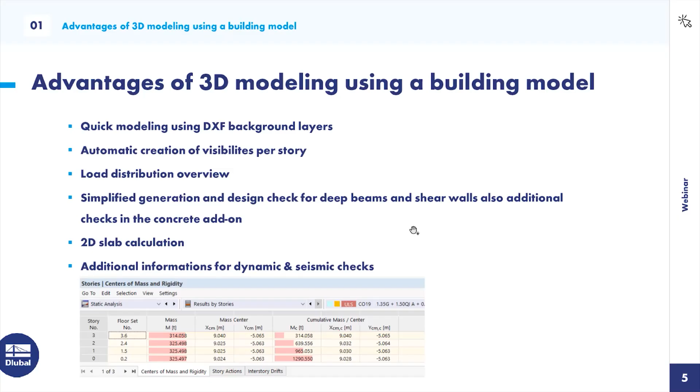Okay, then let's switch to the next chapter. Here is a little overview comparing it with positional structural analysis. The pros of positional structural analysis are, of course, that you can model it very fast and also do the design checks, and you only have 2 degrees of freedom in this 2D calculation. So you mustn't consider so many effects and so on. It's very simple, and you can check it very easily.

The cons are when you design a slab or, let's say, a story, you calculate this, then you must make a load transfer from the story to the walls, to the columns, and from there again to the slab. So you must transfer again and again until you are on the ground floor. And there you can make a failure very easily when you forget some loads.

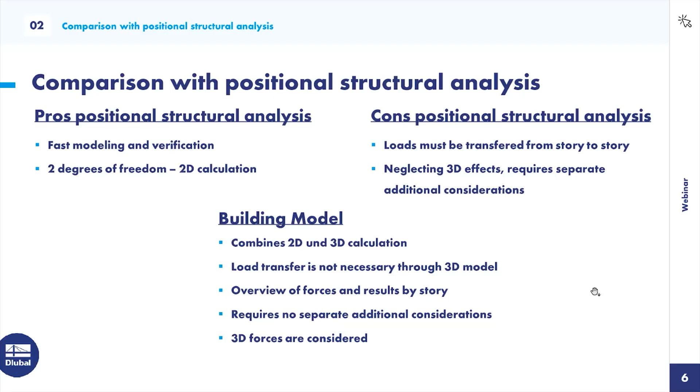Okay, now about the impact of our construction stages analysis. It's more nice to know. I only want to show you the options you have with our add-on. Here you are able to consider construction stages. So I will show you, for example, here first the walls and the columns. Then, let's say after 30 days, we make our slab for the ground floor. 30 days later, the first story, and again.

So in connection with the time-dependent analysis, you have the option to also consider time, and that's very great because I'm on the concrete team. That's important. What I think about first is the material parameters, for example for creep and shrinkage. So you see, after 30 days, it's a completely different creep coefficient in comparison to 120 or 150 days. So you will have influence just from these material parameters. And we can consider this when we use the construction stages and the time-dependent analysis. But I will also show you this later in RFEM 6.

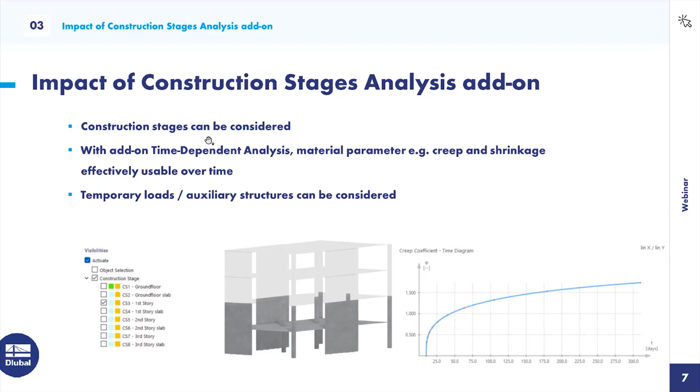Okay, that should be my overview of what I want to show you today. And now let's switch to RFEM 6. Therefore, I will create a new model, and let's call it building model, with the 3D type of model, of course. And here are the add-ons we need. At the end, I will show you the construction stage analysis and the time-dependent analysis. But for the first step, I only activate the Building Model add-on and our concrete design.

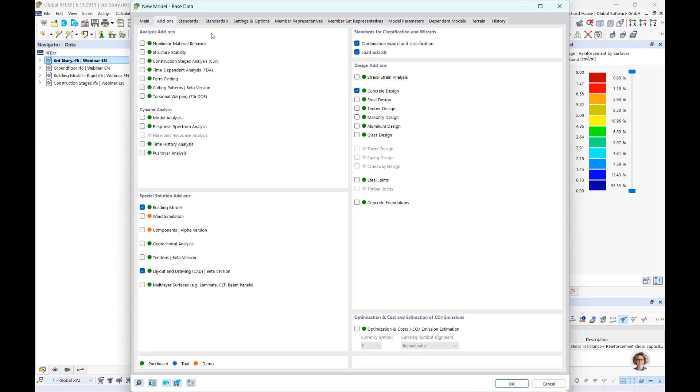Here in the standards, I choose a German example today. So let's choose the national annexes here.

And what I also want to show you is we have load wizards for wind and for snow. And a nice connection we have, I want to show over the model parameters. So if you know, we have our Geo-Zone tool where you can see the forces from seismic, from snow, or from wind. And we have a connection in RFEM 6 directly when you click on this button. In the background, it opens our Geo-Zone tool. Here you see our information about snow, wind, and seismic.

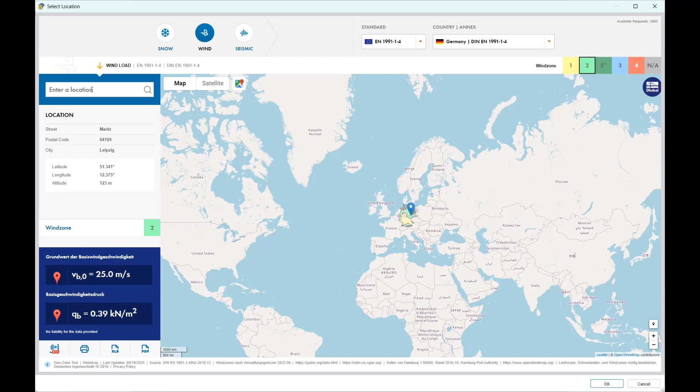So let's take our Dlubal office in Leipzig and say OK. And so we see here the characteristic values of the snow load and also of the wind loads. And when we click OK, RFEM 6 imported this information from the Geo-Zone tool. And when we now click OK, RFEM has the information, and when we click later to the load wizards, RFEM has directly the information, and you don't need to choose the category or the wind zones and so on. But yeah, I will show you later.

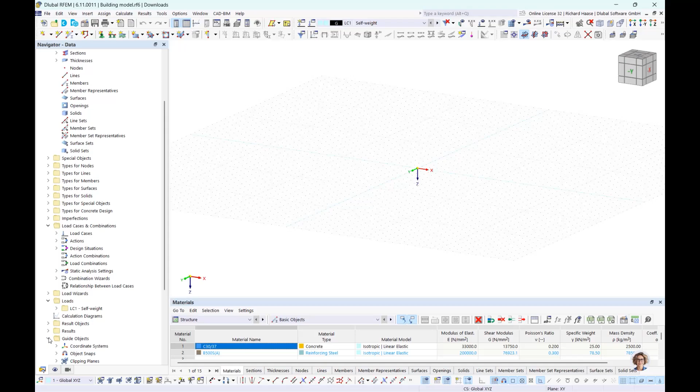Okay, then let's go to the materials. I have chosen a concrete C30 and reinforced steel B500. And of course, I want to show you the quick modeling. Therefore, we need under the guide objects our background layer. Okay, here we have our background layer. And first let's switch to the building model. And here we can create our building stories.

And let's say we want to have a 3-meter height and want to have 3 stories over the ground floor. And we want to choose here our floor type rigid. And when we choose semi-rigid or rigid floor diaphragms, we have the option to choose here for all nodal and line supports. We can choose the supporting type, which you can analog design in a 2D calculation.

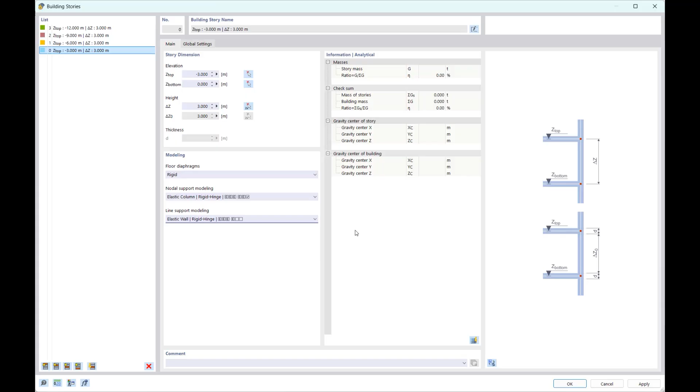So let's say we want to have for the upper floors hinge to hinge, and also here hinge to hinge, and in the ground floor we have a rigid hinge and also a rigid hinge. Okay, then we have created our stories. And then let's begin with the modeling.

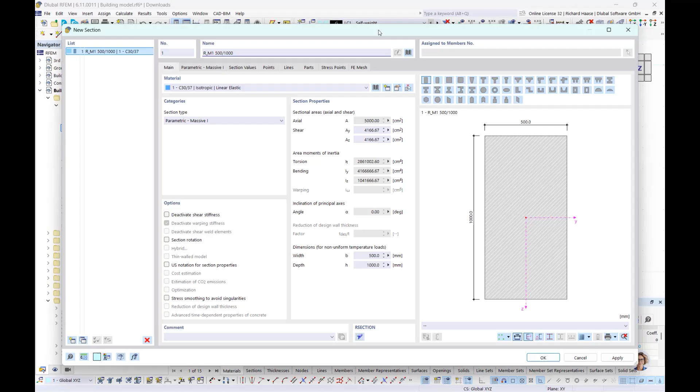First, okay, maybe we delete this and say, okay, I need a new section. And we see here we have circular columns. So I choose this column. Okay, let's say 200 is the default setting. And now we want to measure the information directly from the DXF background layer. And can say, okay, from here to here. And it's switched to 500 millimeter diameter. And say, okay. Then we also have our walls.

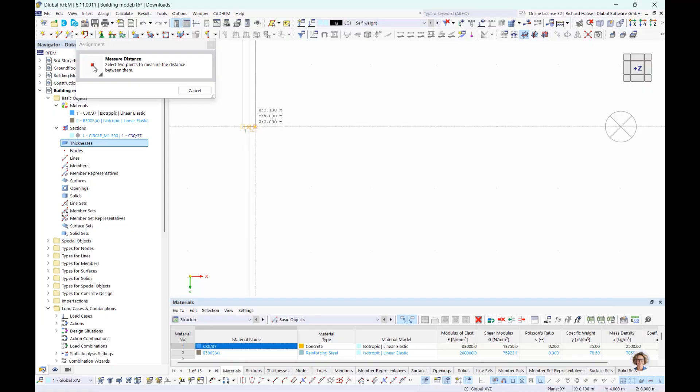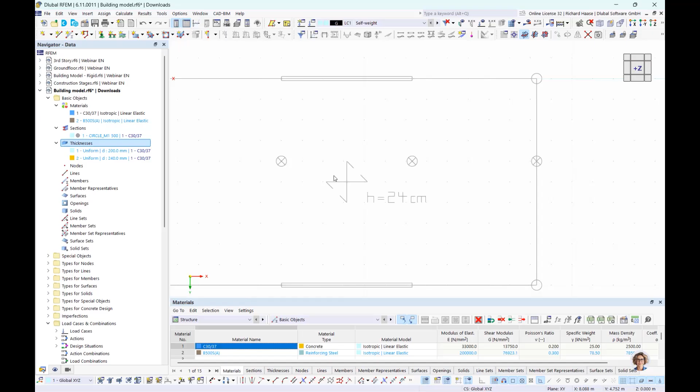Therefore, we do the same, a new thickness, and say, okay, the only thing I changed, so that you see that it works, is 300 millimeter. And let's say it's a default setting, and I measure now the information from the DXF file, and we have our 200 millimeter for our walls, and we need a new thickness. And I show you for the slabs, and it's 24 centimeter. Of course, you can't read this information off this 2D background layer, so I take this information and then it's fine.

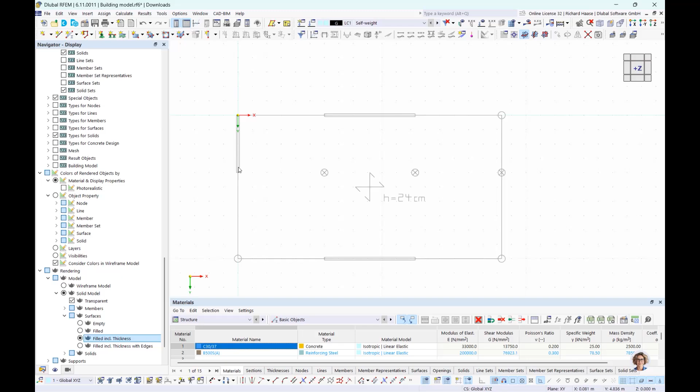Okay, then we have created our section and our thicknesses, and now I want to change for the input our rendering. Therefore, you go to the model, solid model, surfaces, and here we have the option filled inclusive thickness. So that's very good for control. You will see what I mean in a few seconds, but let's first start with the columns. So this button is only available for the Building Model add-on, and this button gives you the option of modeling via the bird's-eye view.

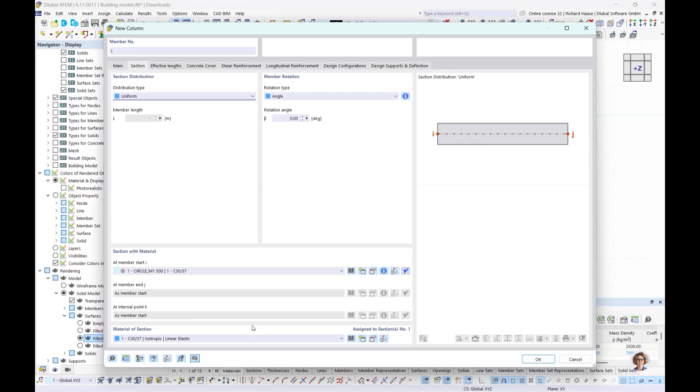So let's start with our columns. Okay, we choose our measured section, and here we can select the building stories, and let's say, okay, we have this column in all building stories. Apply, and oh, I made a mistake, sorry. Again, I clicked too fast. Okay, so we have these columns, and go here, and you see directly this big bubble. It's the sum of the masses per story.

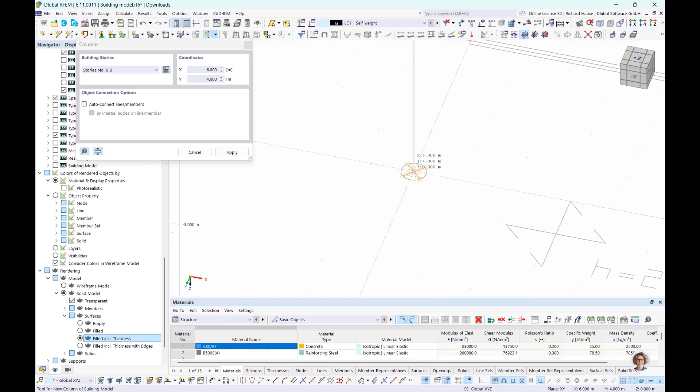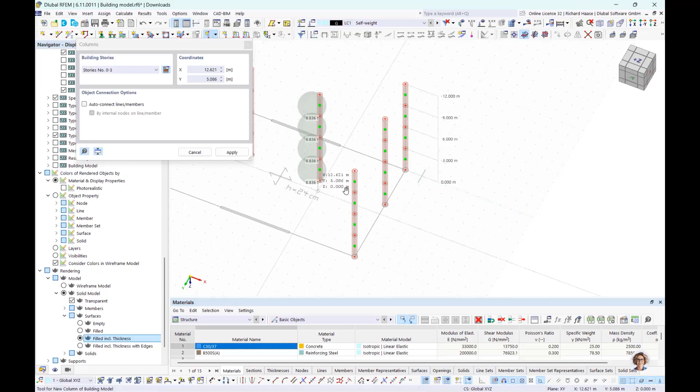So when we click here to another point for the columns, you see, okay, it's growing and moving more into the middle. So, and let's do this for the others too. And our columns are ready. So now the same game for our walls. Our 20 centimeter. Okay. Maybe we switch back to the bird's-eye view. And wall 20 centimeter.

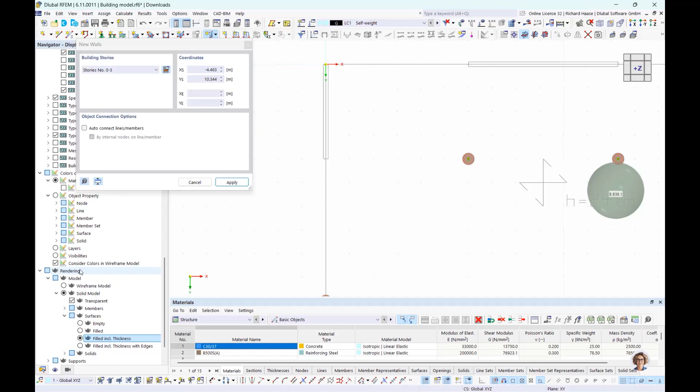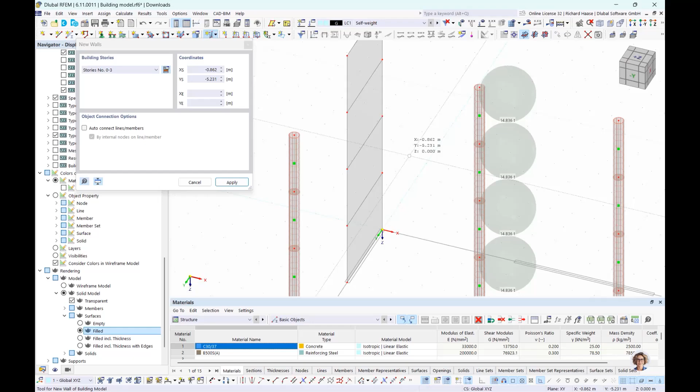And now you see here our rendering option. There you have a direct control option if the thickness fits the background layer. And you see, okay, it fits. The default setting is only filled, and therefore you have this 2D visualization. And here we have the real thickness, and I prefer this for controlling. Okay, let's continue with the other walls.

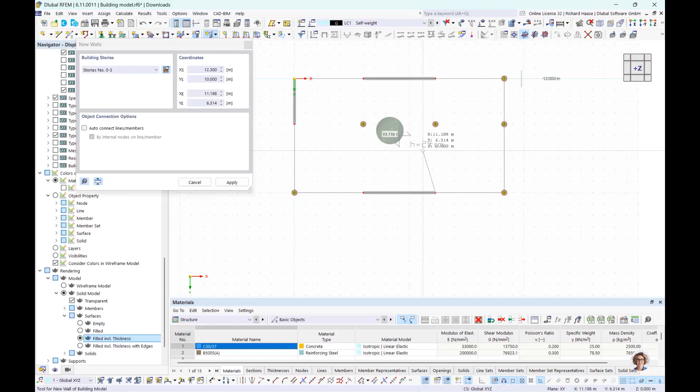And our last walls here. Okay, one thing is missing, that's the slabs. Let's choose here the rectangular floor. Therefore we need the other thickness, 24 centimeters. And of course, all stories is activated.

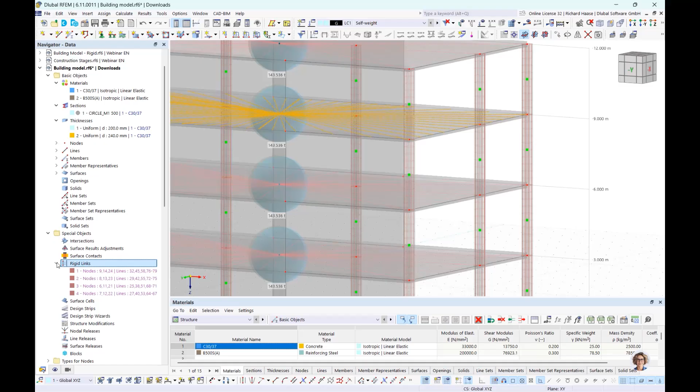Good. Now we see here these red lines. It's the special thing of our slab type rigid, because for these rigid slabs we have here also special objects, rigid links, and these rigid links connect the edges of every slab to the center of mass per story.

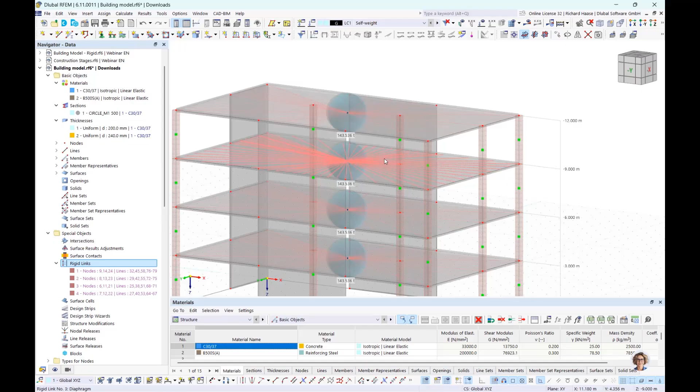So this is a good point for dynamic analysis, because it simplifies the masses to one point, and it's then more clear for dynamic and seismic analysis. And this reduces also the calculation time and the eigenvalues. It's a really nice feature for dynamic analysis. Okay, so we also can deactivate it here, in special objects.

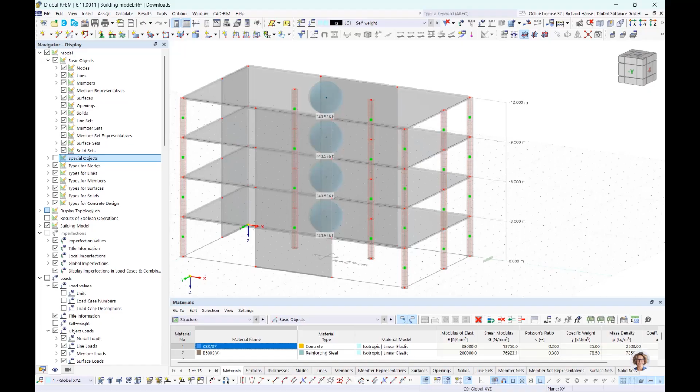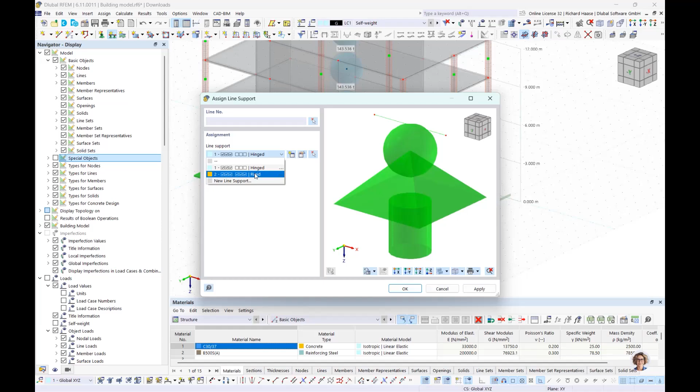And now let's continue with the supports. Let's say we have here our fixed nodal supports. Okay. And also the line supports, let's say it's also rigid. Choose here, here, and here. Okay. Then let's go to the loads.

Therefore, we must create some load cases. Let's say here self weight, or dead loads. And here we need some live loads. The snow and the wind load cases I will show you through the promised load wizards. So let's say okay here, and go now to the load cases and create some surface loads. Really simplified, but it should fit.

Okay, let's say we have here 2 kilonewton per square meter, and we can say apply and next. Switch to our live load case, and here we want to have 3 kilonewton per square meter. Okay, and let's finish this. We also have the option to control this very fast, but it looks good.

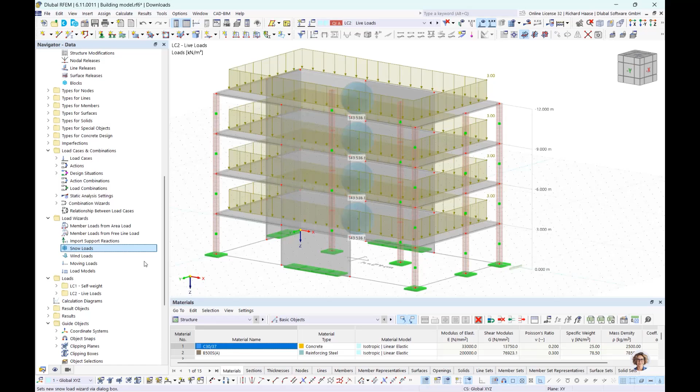Okay, but let's go to the snow loads first. We want to create a new load wizard for snow. We must first pick the roof corner nodes, here, and here, and we have a flat roof type. Go now to the parameters, and now we see what we did in the beginning.

The definition type is changed to map and parameters, to this German location, and you see here it's automatic which load zone, which height, and the characteristic snow loads and other coefficients. So this is simplified, and so it's easy to switch here. Okay, then to the load cases.

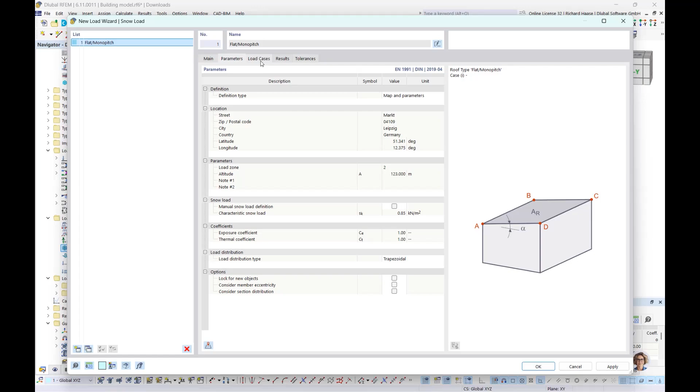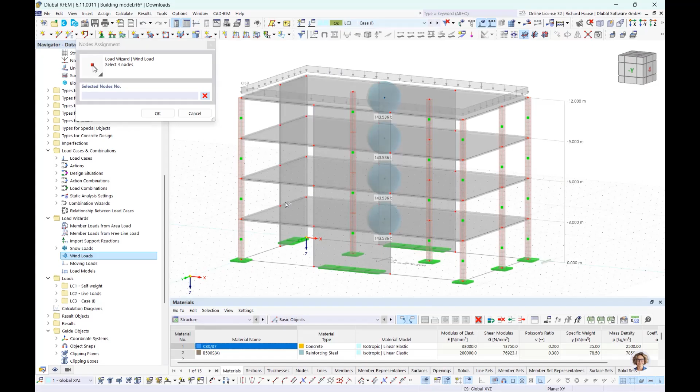So you see here, I would create a snow case here for you, and you only must click this button, generate load case, and say okay. And very fast, we have now our load case here with our snow loads, and the same works for the wind loads. Here we must, okay, that's the base corner. And here. Okay, the same for the roof corners, for the wind.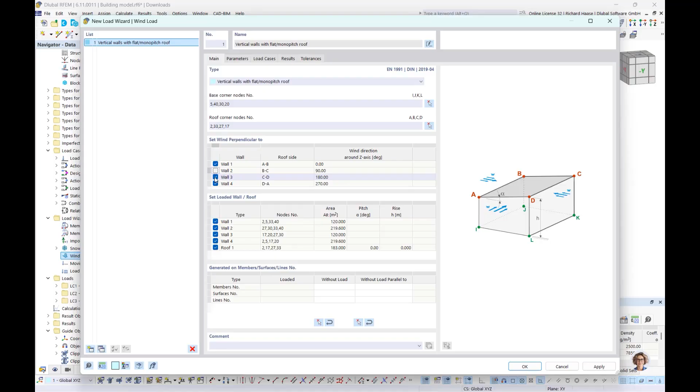Okay, so then you see on this picture, we have here our 4 wind directions, and let's say we limit this to wall 1 and 4. The parameters here are the same. You see our location, the terrain category, altitudes and heights, and load zone. It's automatically transferred from our map.

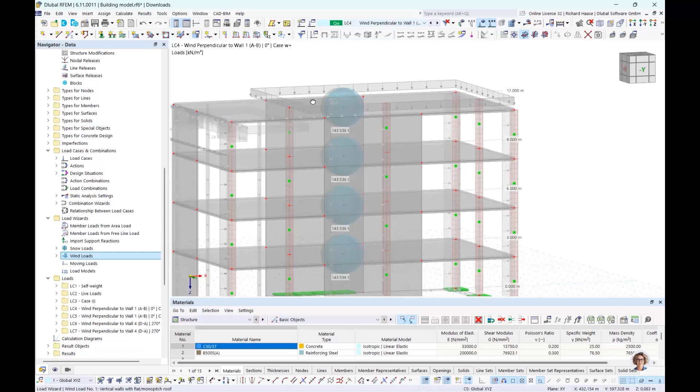So we have here again this option to generate automatically our load cases. We have here 2 cases per direction, and say okay, okay, and we can prove it, of course. So we see here our wind loads, here especially this load area for the slab, and the same works here for the other wind case.

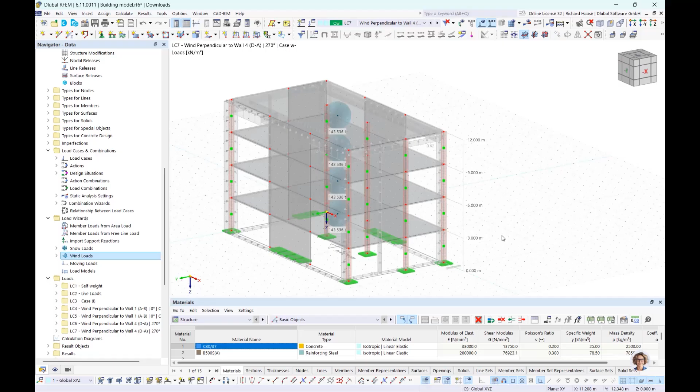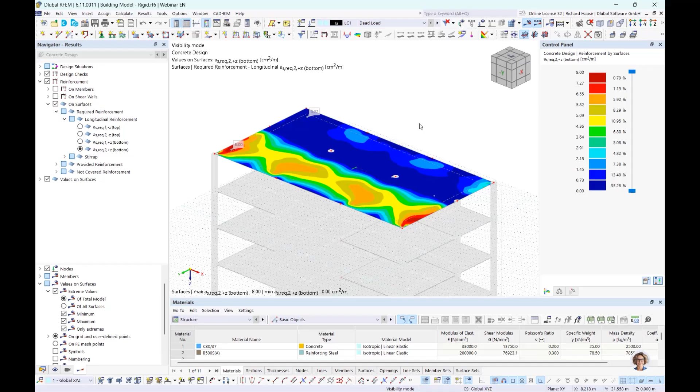Okay, so our loads are finished, and I don't want to waste time with calculation, and would switch now to a calculated model, our building model. Here we have results, and let's go to the dead loads and switch to the static analysis. So, oh, I haven't calculated. Okay.

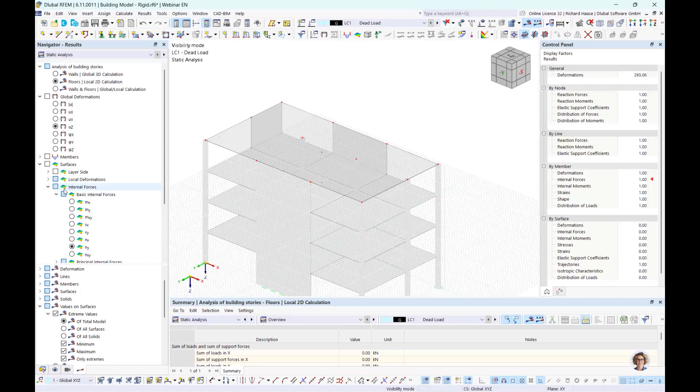And here we see the first thing which is activated when you have chosen the rigid or the semi-rigid floor type, that it is calculated 3 times, and that's because we have now here an additional option in the static analysis of building stories. So you can have a look only on the floors, on slabs, and I want to show the internal forces, the moments.

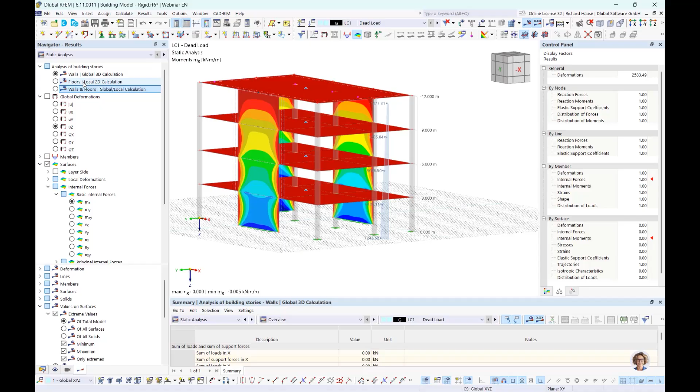Switch back to all, and now you see here really only the results per story per slab. When we switch to the 3D walls calculation, we have additionally our walls, and because these walls are connected via the slabs, internal forces can also be in the slabs. And this last option, walls and floors, is, let's say, a sum of these two. And here we have our

combined results. But what I want to show you before is our load distribution for the case of the dead load. Oh, and I forgot here our visibilities, which are automatically generated, sorry. In the normal case, you must define this by yourself, and the building model add-on creates them automatically per story, so you can easily switch and have for every story a fast generated view.

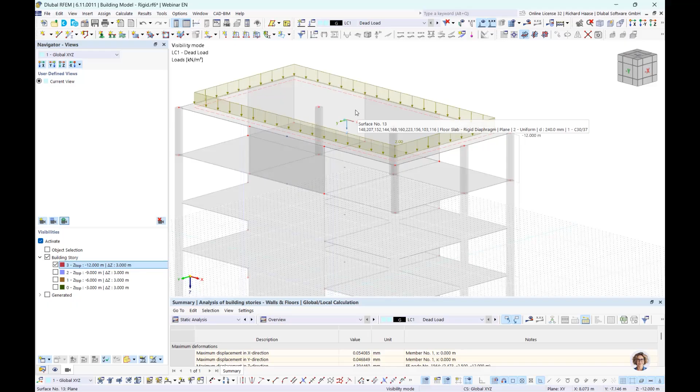Okay, but let's go to the third floor, and here we have our surface load, and we now have the option to see how the load distribution is. Therefore, we right click on the surface and have here this button, loads from distribution surface, and now you see how the surface load is distributed to the walls and the columns.

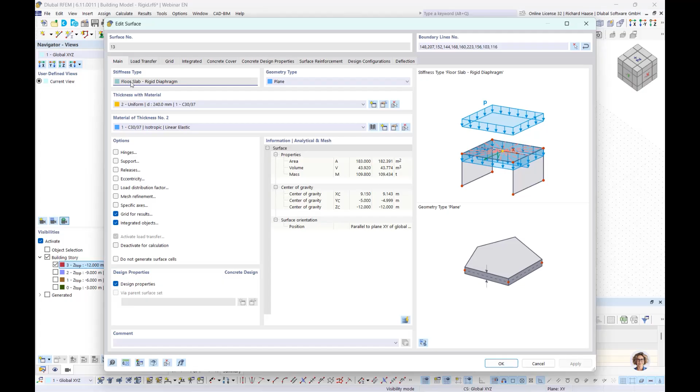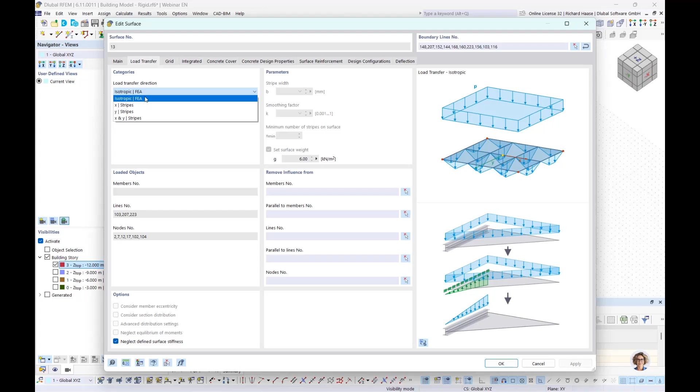And when you double click on the slab, you see here our stiffness type, floor slab rigid, and we also have here a load transfer menu. The default setting is the FEA type, but you can also say it should be only in the local axis X or Y stripes, or X and Y stripes, if you want to do it that way. Okay, but let's switch back.

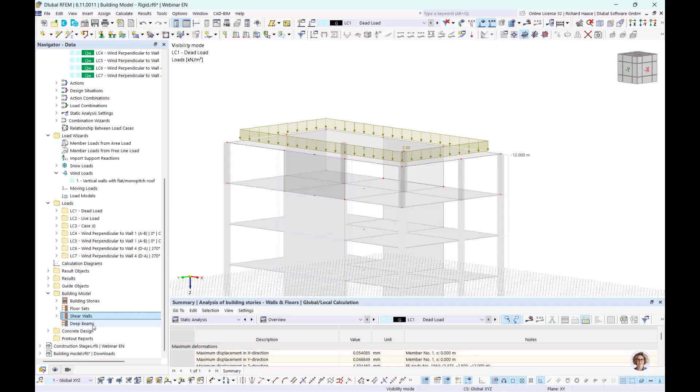Another thing I also mentioned in my presentation before is that we have in the building model the building stories you already see, and now we also have the option to define shear walls and deep beams. The shear wall I did here before. So when we click here, we have this one wall, and it is easy to define. You only must select surfaces or surface cells, or even a member is also possible.

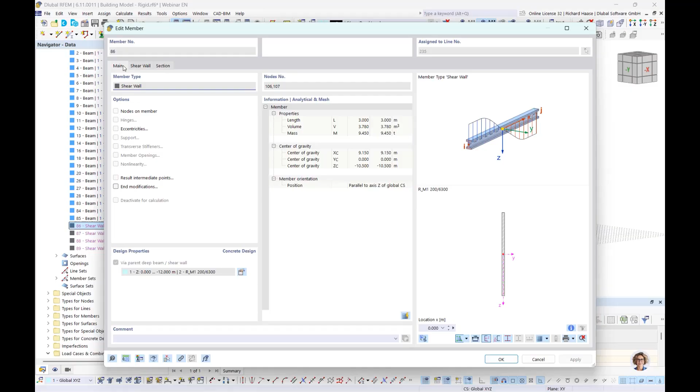And in the background, we can see here our columns, and in purple, the shear walls, which are generated in the background. You can also see here it's a result beam, let's say, which automatically integrates the surfaces, surface cells or members chosen before. And finally here our member sets. So you can also do this the manual way, but the building model add-on simplifies the steps.

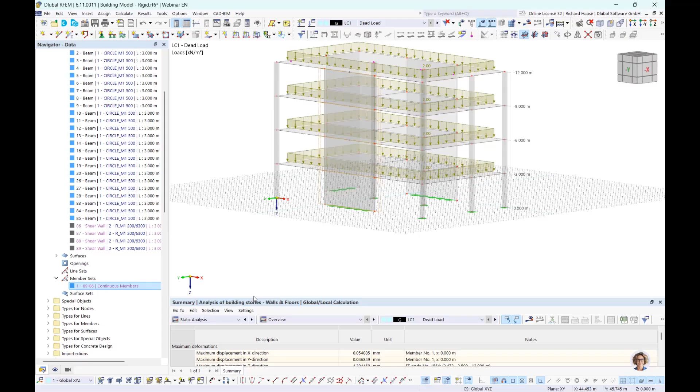And another good point is when we go to the static analysis, we have here a new chapter, results by stories, and can really see which results come from which story. We can see story actions, horizontal forces, for example here, or interstory drift of deformation.

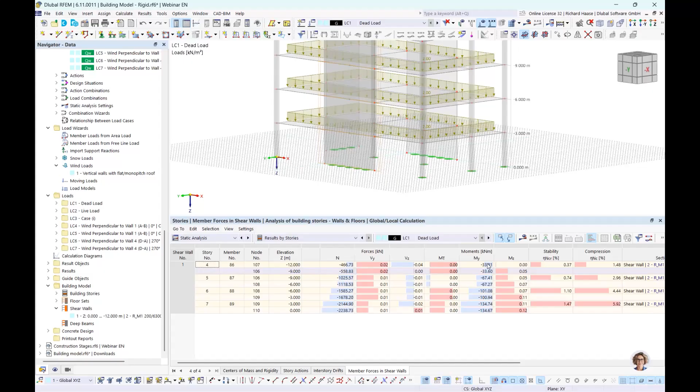And because we now defined our shear wall here, we have a new chapter, member forces in shear walls. So you also see here the axial forces, the shear forces, moments, separated for every story. And that's a feature only the building model can do. Of course, you can create it via a result beam, but these results by stories you wouldn't have without the building model add-on.

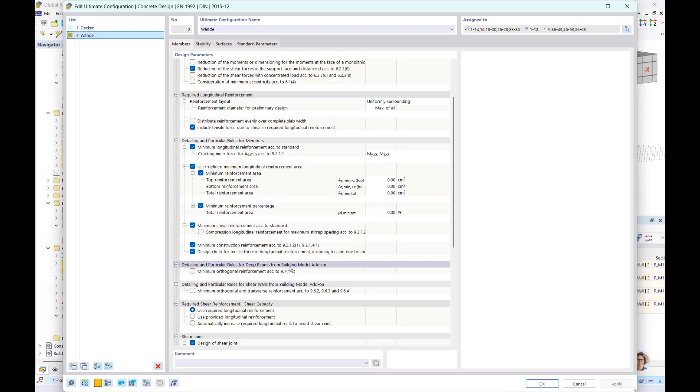Okay, then maybe let's switch also to the concrete design, to the configurations. And because these shear walls and deep beams are result beams, we have under the concrete configurations, in the chapter members, special additional checks, which are only possible when you use the building model add-on.

And also for a better overview in the concrete design, when we check here, we have additional design ratios or reinforcement calculations for shear walls and deep beams. So again, when you don't use the building model, all these ratios would be found on the members, so you have an extra chapter for that. It simplifies the work and gives a better overview of the results.

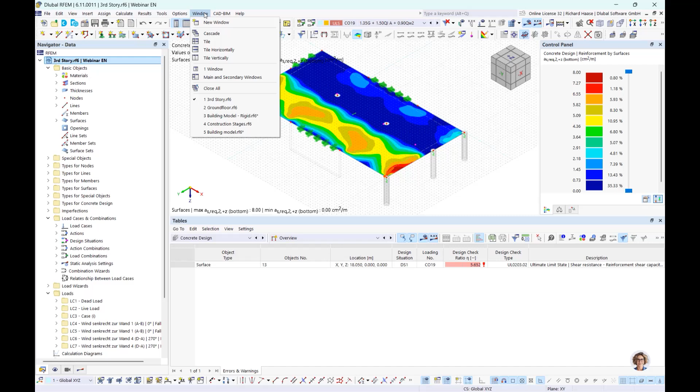Okay, then let's compare to, let's say, a traditional way to analyze slabs. We want to have a look at the third story, and I will show you that we have really exactly the same results. Therefore I want to arrange the windows next to each other, and that was also the wrong one. Okay, now we have selected both. I want to show you the window again.

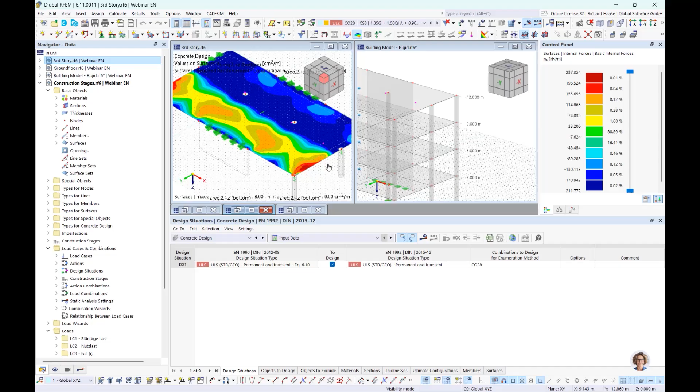Go here, select only the third floor. Okay, now you see the 2D model.

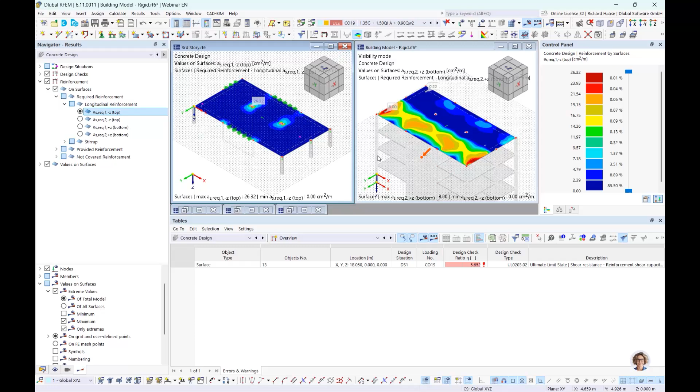Choosing also here type of model, 2D plate, and let's compare the required reinforcement. Let's go here, and with our building model, you see we have exactly the same results.

Let's do it again, and the last one. So you see it's with the building model, it's possible to have a traditional structure analysis calculation of 2D, but integrated in a 3D model. And yeah, you get the same results here.

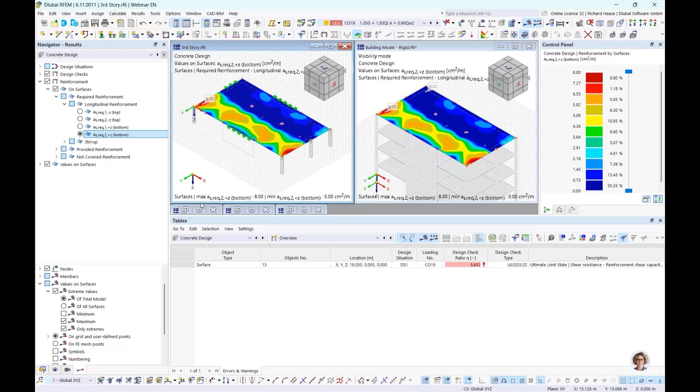And yeah, that was what I want to show you. So okay, maybe we go, I hope this was the right model, to the ground floor.

Because I also want to show you the option with the load transfer, and show you that it works the same way with the 3D model. So yeah, I have created an extra model for every story.

And here my last step was to load transfer from the first story the forces to my ground floor slab. And here you see this connected model. The thing is, it works - you must create in our Dlubal Center connection that all models are in the same folder, and then you have the option to connect these models.

And when we switch to the object chapter, you're also free to use it manually. There you can say, okay, for example, I only want to transfer only single nodal supports or single line supports to this and this node or line.

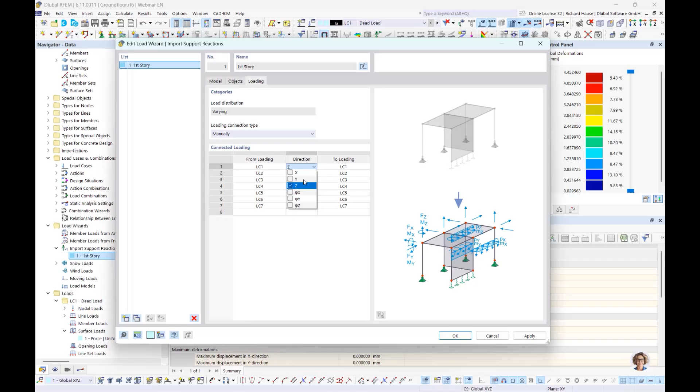Yeah, then to the loading, you also have the option to say, okay, I want to choose it manually. So you can transfer from load cases or also from load combinations to our actual load case or load combination, and can choose here also the type of forces which should be transferred.

So I only choose here the Z direction. And yeah, only for comparison of the dead load, you see here again in this purple color the loads which come from the first floor slab, and yeah, can control it here, also the forces.

And yeah, and these models are also connected. For example, when I change something in the second floor, these load transfers are connected with each other because they are in the Dlubal Center folders, and then it's an automatic recognize that this change

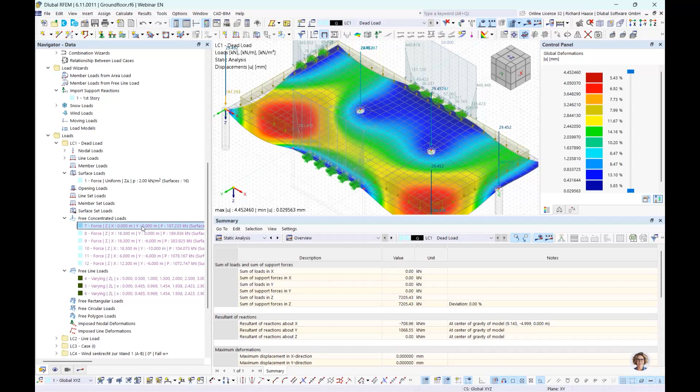also results. And if you don't want this, you can also say, okay, that's finally good enough. You can separate here the connection, and then yeah, it's fixed.

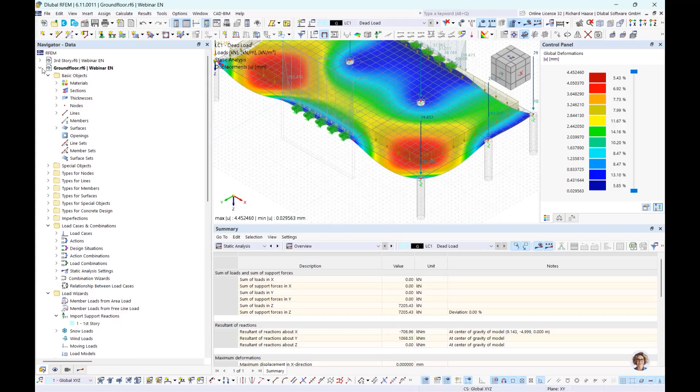Okay, but the thing I want to show you are the sum of loads, and we have here our 7.2 meganewton. And when we switch back to the building model, so 7.2, dead load result by stories.

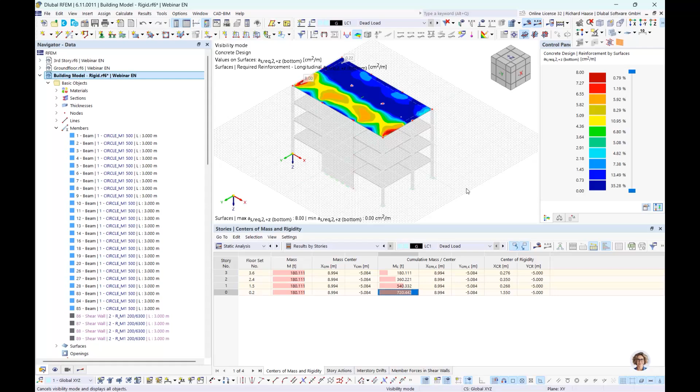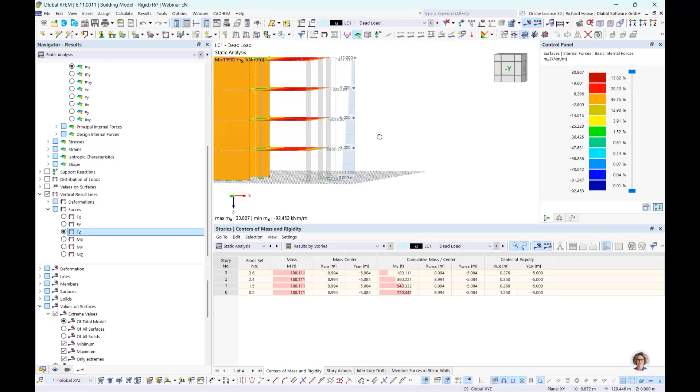We have also here 720 here in ton, but we also can do this when we cancel this over the static analysis. Here we have vertical result lines, also a feature only from the building model. You can say forces and FZ, and you see also here the forces per story, and finally also here at our 7.2 meganewton.

So the masses are identically when I choose it in 2D and 3D. Okay.

Then let's maybe we can deactivate it again to the story actions. So I mentioned also that it has pros when you use dynamic analysis or seismic analysis.

So you have here, okay, for dead load it's a little small, but the forces in global X and Y, and these forces you can compare, for example, for the seismic forces, and can think about it if the seismic forces are governing.

And also with the interstory drifts you can do serviceability checks and say, okay, this deformation per story is too high, or it's okay.

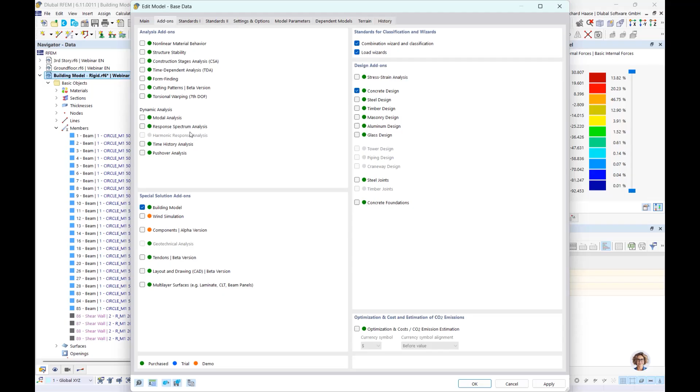And also, but I don't want to blow up this model here. We get also - but I only want to say to you, when you would have activated this response spectrum analysis, you would also have this result by stories chapter for the response spectrum, and there is also a value which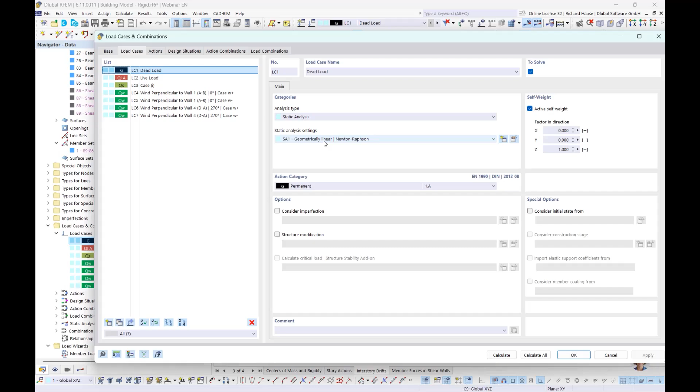shows you, okay, is it allowed to calculate to theory of first order, or you must switch to second order. So first order is geometrically linear, or the second order theory. So okay, and about the rigid links, I told you before that it has a good effect for the seismic.

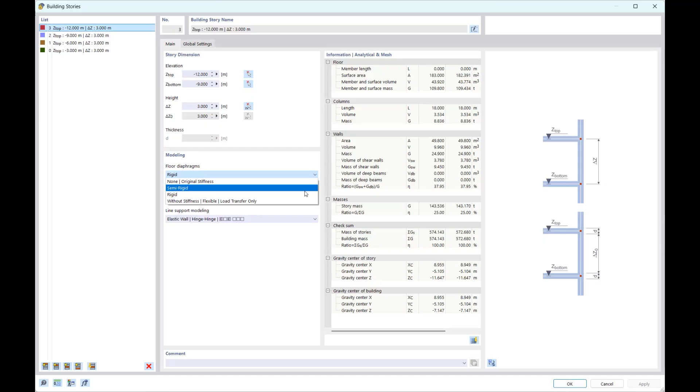We also have this None | Original Stiffness option, and when I choose this, I don't have these 2D and 3D calculation types. This is like modeling a normal 3D model, so I must create the hinges and conditions manually. But what I have when I choose this is also additional information and result types, result by stories, so this is usable for every type.

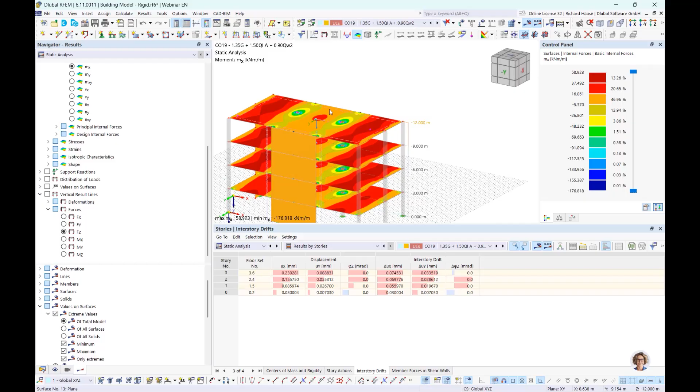So then let's have a look at one combination. I choose the 19 and compare here something. Let's go first to the third story. And of course, when I have a 2D model, we don't have axial forces in the slab, because we have this 2D model.

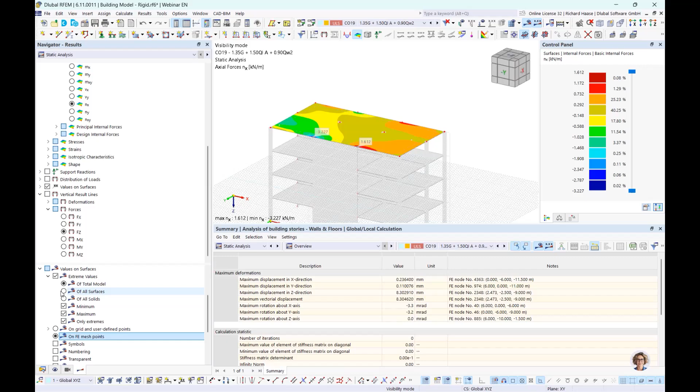And when we switch now to the building model 19, we see various surfaces, and we want to see all about extreme values. We see, okay, we have nearly zero normal forces, so it's very close to the 2D calculation.

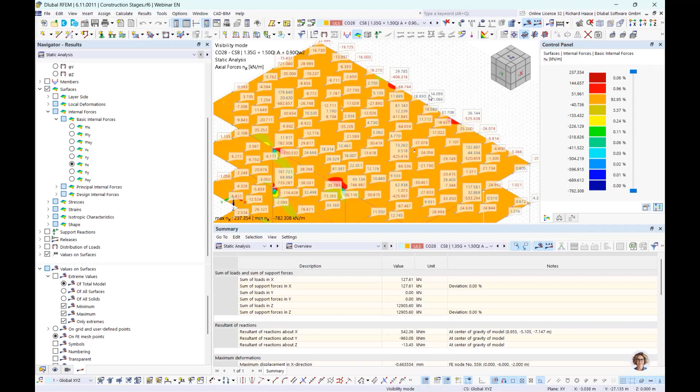Now I want to open a model with the construction stages. When you really consider the stages, as I showed at the beginning, and we go to this third slab, you see, okay, we also have here some axial forces in the slab, so this could have an influence on the results. So only that you know why there is a difference between this 2D and 3D, it could be because of these axial forces in the slab.

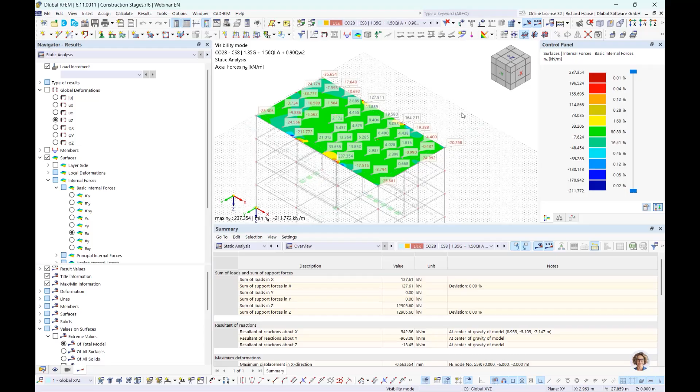Okay, but that should be with the building model. Now I'm in my construction stages model, and I want to show you short some things about it. With the construction stage, we also have an automatic visibility, and we can see which construction stages I define here.

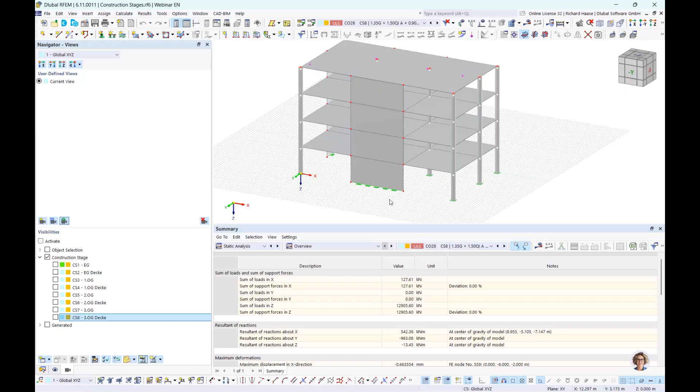I forgot to rename it, so it's the ground floor. Then in the second step, the slab is added. Then the next floor, and so on. And these construction stages we also consider for the load cases.

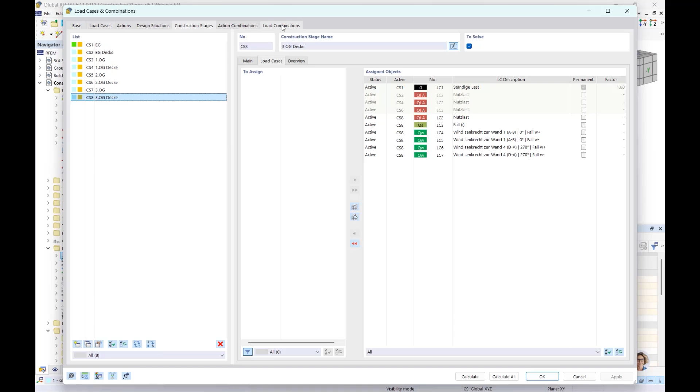So I have an additional construction stage menu, and there we can say, okay, at first we only have permanent loads, and so I can switch the load cases for every construction stage, or even delete them. Here, for example, I say our snow and wind loads really should only be there in the last construction stage.

And these construction stages are also considered in the generating of the load combinations. So you see here these CS are the construction stages, and so you really have calculations for every construction stage. That's the most realistic calculation which is possible, I would say.

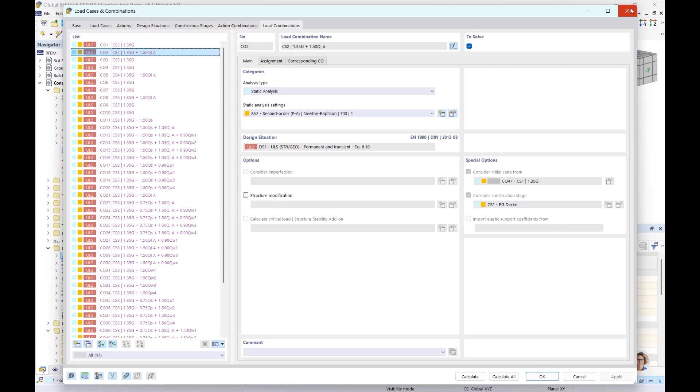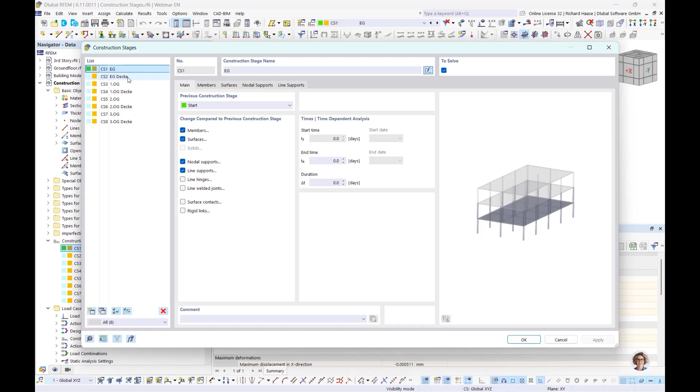I also want to tell you about the time-dependent analysis and the creep and shrinkage effects. Therefore you must activate this time-dependent analysis, and in the construction stages we can then define the duration, start and end time again for every construction stage. So this material parameter, for example for the concrete, can be considered over time, and I find it's a very nice feature.

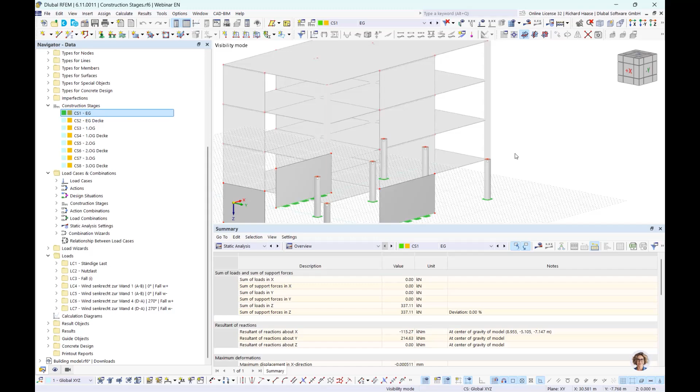Okay, that should be it for my webinar. I hope I could give you some new information. If you have questions, please write us an email, and we will answer them. I hope you enjoyed this webinar, and I want to say thank you from my side. See you, and I would give back to my colleague Andreas.